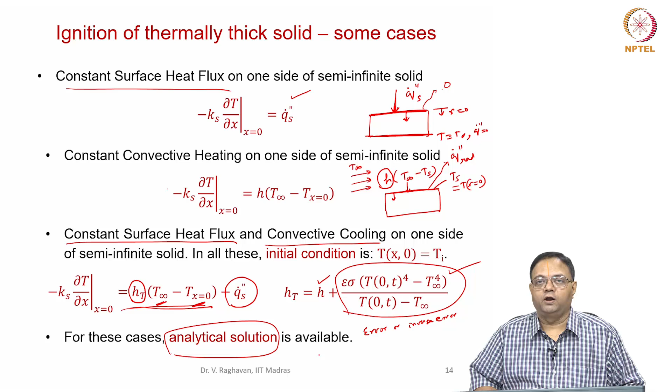So, this is the way we solve the ignition of a thermally thick solid, where the conduction inside solids is very important. Now, some typical solutions we will provide, basically considering some approximations. So, the approximate solution to the thermally thick solid for a particular case where a high heat flux is provided and the heat loss is negligible.

Under this condition the heat flux is high enough, not bare minimum heat flux. See, as I told you, there is a critical heat flux or minimum heat flux which will try to heat up the surface. If you go below that, the surface will not be heated up. The heat coming in will not be able to compensate for the heat loss. But when you have a bare minimum heat or a critical heat flux, then you will see that there is a growth in the surface temperature.

I am not talking about that, I am talking about much higher heat flux now, so that the heat loss term can be easily neglected. Under that condition, for a thermally thick solid, I have a solution for the time for ignition, which is nothing but pi by 4 k rho c (T ignition minus T infinity) square divided by the incident heat flux square.

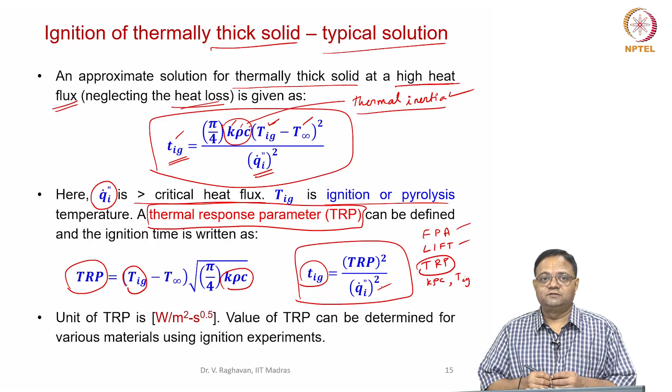And one more thing is, if the flame forms over the solid surface, the heat given back by the flame to the surface will normally be very much higher than the critical heat flux itself. Now, let us analyze the thermally thin case.

Okay, now let us consider a solid which is heated in two configurations. In one, it has a physical thickness Tp and is heated from one side like shown here. So, this is a solid surface of thickness Tp, and it is heated with a given value of incident heat flux from one side. The other side, the black line, can be insulated.

This is one scenario. In the second scenario, there is a solid again of thickness 2 times Tp, but it is now heated from both sides with the same heat flux. Okay. Now, this is the scenario we are considering. When the ignition occurs, so time to ignition we are going to do.

But in this scenario, we are now considering the Tp such that for the given heat flux, it will be thermally thin. Correct. So, just because I choose a Tp value, I cannot determine that as thermally thick or thermally thin. Only in combination with the heat flux can I do that.

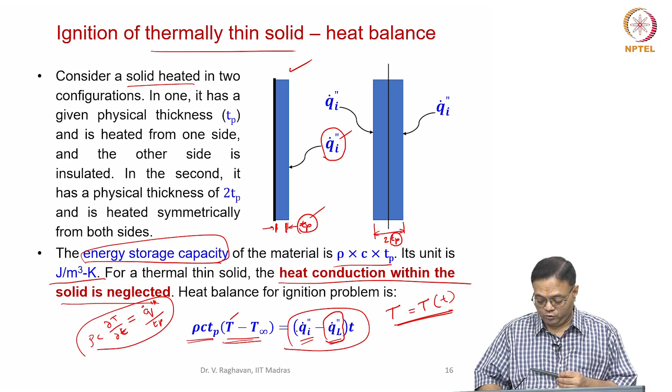So, this is the heat balance equation for the thermally thin solid where I do not have the conduction term K into d square T by dx square.

So, now let us analyze this. Heat loss from the surface will basically be very less initially; when the solid sample and the ambient temperature are the same, it is 0. When the surface temperature increases, there will be some heat loss and it will grow. The heat loss will increase as the surface temperature increases.

Now, the incident heat flux should take care of the resulting heating. If the incident heat flux is not able to cause a positive net heat transfer to the solid, then the solid will not be heated up. Okay, so that is the situation given here.

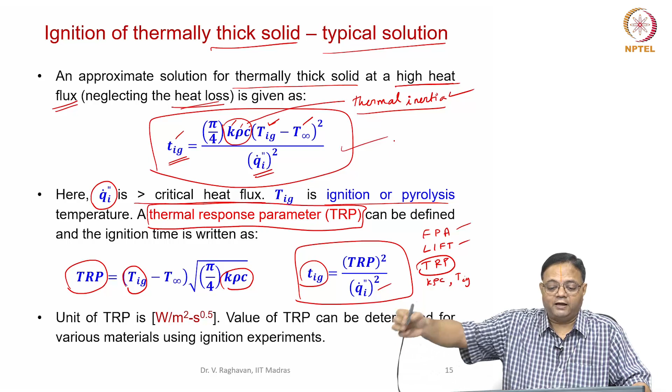So, we are talking about the high heat flux cases where ignition will definitely occur, and based upon the high heat flux case, we have got the expression for the time for ignition for the thermally thick solid as well as for the thermally thin solid. In the thermally thick solid, obviously we need to solve for the heat conduction within the solid, but in the thermally thin we need not do that.

Now, some factors which are affecting the ignition for the thermally thin. So, we have classified Tp value based upon the conductivity, heat flux, etc., and classified that as thermally thin. We can also do the thermally thin criteria by using the non-dimensional number called Biot number, which is nothing but h, the heat transfer coefficient, times Tp, the physical thickness, divided by k, the thermal conductivity of the solid. So, h Tp by k is the Biot number. Understand that this is the thermal conductivity of the solid.

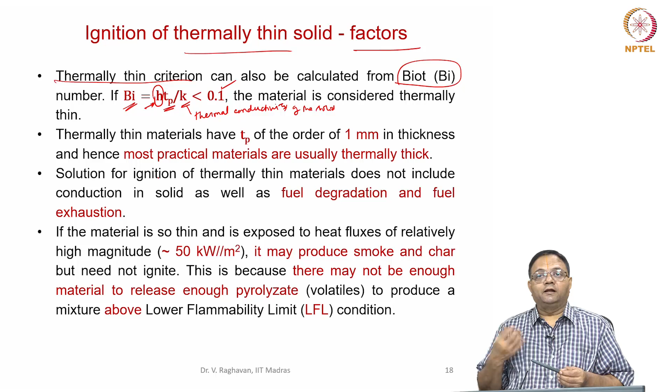Now, if the Biot number is calculated in this manner, how will you calculate h? For example, given some heat flux, based upon the ambient temperature and the surface temperature, if I take some average value of h, you plug in here; Tp is known, k also is known, then calculate the Biot number. If the Biot number is less than 0.1, then the conductive resistance is very small, so that the surface temperature can be assumed as the internal temperature also. So, we can say the material is thermally thin.

Okay. So, if the material is about 1 mm thickness, then for most practical applications where the heat flux is going to exceed, say, 20 kilowatt per meter square, the thermally thin assumption can be made. Otherwise, we have to invoke the thermally thick. So, 1 mm thickness we will not use for practical applications. That is why in most practical applications we have to take the thermal thickness into account. That is, the physical thickness will be such that it will be thermally thick also.

Now, the solution for the ignition of the thermally thin material does not include the conduction. We have already seen that. Similarly, the fuel degradation or the fuel exhaustion, that is, the fuel being consumed. For example, if there is a thin plastic layer, when it ignites, it also burns. That means when it burns, the component of the fuel will not even be present there. So, there is no need to consider the solid phase at all when you classify the material as thermally thin.

If the material is so thin, there are some other aspects which we need to understand. So let us take a very thin material where you are exposing it to heat fluxes of very high values, 50 kilowatt per meter square. Then what happens is, it may not ignite; it may just decompose and produce smoke or char, etc., based upon whether it is a charring material or not, and will not even ignite. It will just vanish by decomposing, because when you have a very thin material subjected to very high heat flux,

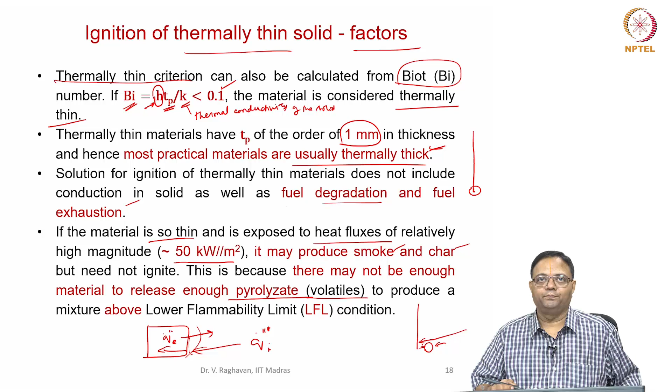For thin material, it is not so. So, the burning of, say, curtain layers or cellulose sheets, etc., will be very complex because they are transient in nature. A steady burning can occur in the thick case. In the thin case, it is only transient; it is very highly time dependent. Okay. So, there are differences between thermally thick and thermally thin cases.

Okay. So, the next aspect is the fire spread.

So, as we have already seen, once we have a solid fuel, somehow I ignite it. First of all, I need to heat up, get the surface temperature to pyrolysis temperature or ignition temperature, then form a flame. Nice. Now, this flame has to propagate. So, sustained flame is formed. So, ignition is over now. This flame has to spread over the solid material.

For that, it has to heat. The flame has to heat the layer of material next to the anchoring point and produce more volatile gases, and this volatile gas is mixed with the ambient air and forms a mixture, and the flame passes over this. So, this means that the heat feedback from the flame to the surface is extremely important for the flame to move, or we can say that one ignition is occurring due to external heat flux and also the pilot flame. Now, the subsequent ignition is caused by the flame itself.

Do you understand? So, the flame spread, as I told earlier, is a subsequent ignition process of the downstream layer of the fuel, causing the fuel gases to come out of the condensed surface and mix with the ambient air, and the flame will propagate through that. Okay. So, a moving flame in close proximity of the source, where the fuel vapor or gas originating from the condensed phase will be able to feed the flame from the fuel side, ambient air from the gas side can come and at least sustain the diffusion flame. That is the flame spread process here.

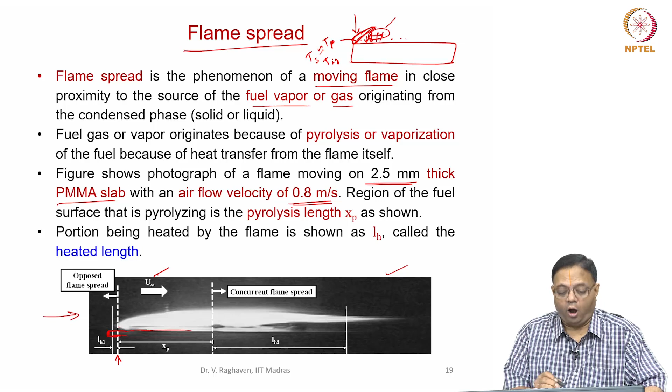Now what happens is, if there is a uniform velocity coming in this direction, then from this point the flame will move in the concurrent direction, in the same direction of the air velocity, or in the opposed direction opposing the air velocity also, because there are fuel layers available. For example, I take a long PMMA slab and ignite at the middle, and from left to right there is an airflow. So from the middle to the right side I will have a concurrent flame spread, from the middle to the left side I have an opposed flame spread. So in one shot I can see the behavior of both concurrent and opposed flame spread.

So the important parameters in this case: first of all we will see pyrolysis length. What is the length of the fuel surface which is heated by the flame, causing pyrolysate or the volatiles to be released? That is the pyrolysis length. Okay, this is the length which has been heated by the flame, causing volatile release already. Now the next one is called heating length, LH, or heated length, which is the length to which the flame has heated the fuel but pyrolysis has not occurred yet.

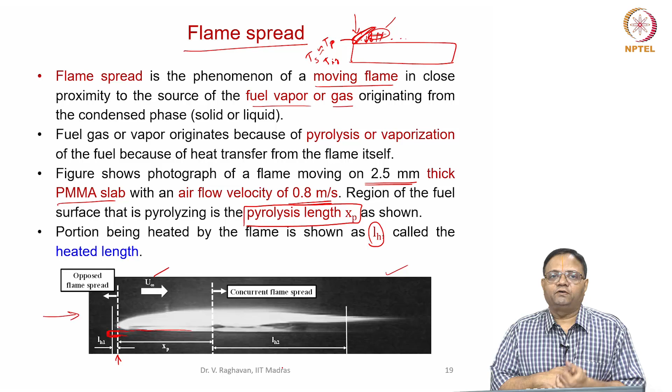Okay, so we will continue in the next class with this configuration. The flame process in a solid is more complicated than that of the liquid because of several factors which we will see subsequently. So I will stop here.